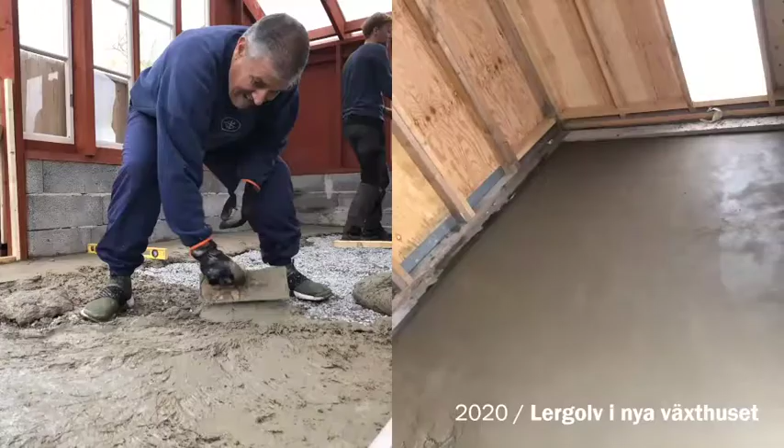I thought it was well put that we combine school with work, instead of having this division. It's about bringing community back into building, and that's what's happening at Egnahemsbyggande with learning and making real stuff as we learn.

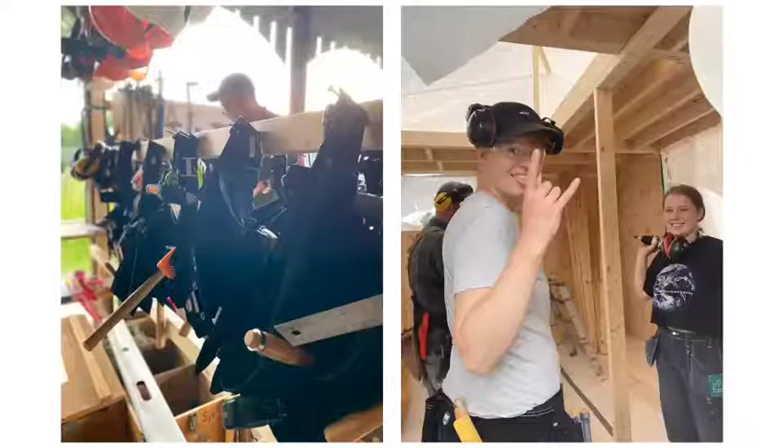When I'm thinking about building houses today as an amateur, to me it feels even easier to do, and that's my experience.

I wasn't there 80 years ago, but I think it's even easier to actually build a house on your own today than it was 80 years ago.

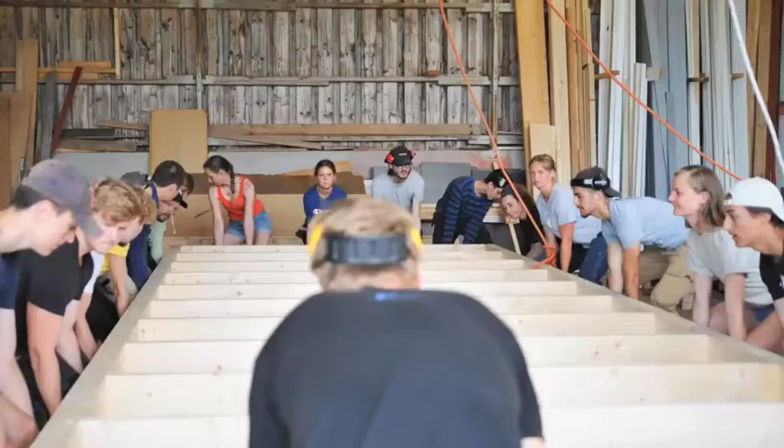Houses are more complex in many ways, but we have much better tools, much better planning tools, and much better technical tools. So actually we should be able to build, like we did 80 years ago, with more amateurs and professionals working together.

This is from one of our projects this summer, building Ellen's house together.

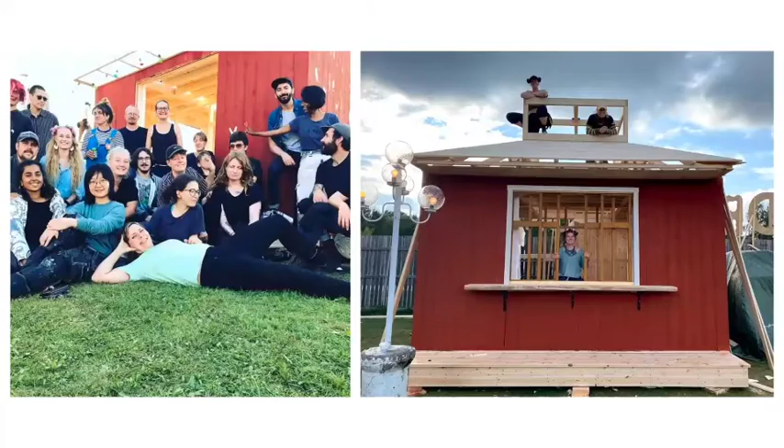This is another collaborative house building project we did this summer. Someone here that participated? No? Okay.

But the question for me is, these things are very nice, but can they be scaled up to building things that actually make a difference, by building whole areas of self-built houses?

Not only can we do the nice small things, but can we scale it up to provide the housing? I hope we will talk a bit about that today.

Now I'm going to give the floor to a person who is involved in a project that is perhaps an example of this.

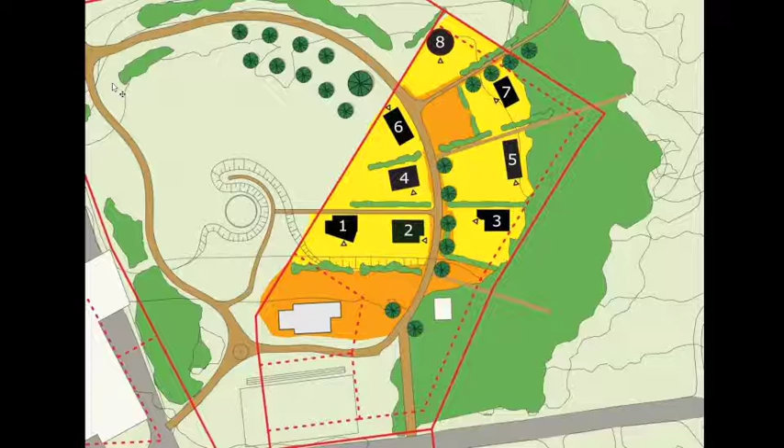Det var en fotbollsplan för 3 år sedan. Och vi har fått anstränga oss för att det inte ska se ut som en fotbollsplan längre. Den hade stått tom i ungefär 15 år. Det första vi gjorde var att börja gräva för väg och husgrunder.

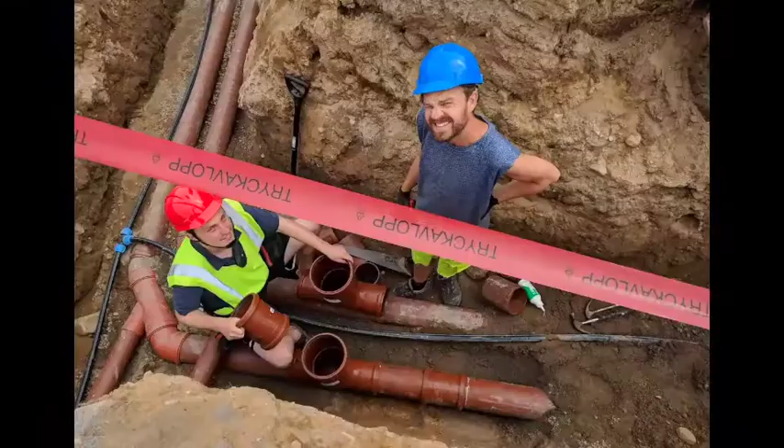Vi hade inte tänkt ha vatten och avlopp i de här husen eftersom de skulle vara enkla. Men när vi ändå grävde vägen så sa grävmaskinisten: ska ni inte lägga ner lite rör? Och det var ganska bra gjort, för nu några år senare säger folk: ja, men om jag skaffar barn i framtiden så kanske jag vill ha rinnande vatten inne. Och om jag vill sälja huset så kanske det är lättare om det går att koppla på vatten. Så det ligger nerlagt rör till alla husen, både vatten, avlopp och dagvatten. Men ingen har hittills kopplat in det. Det är möjligt att göra till alla husen.

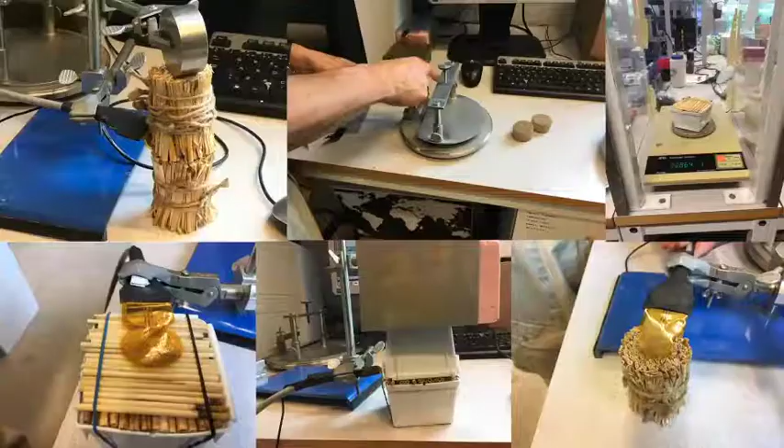Looking around, you find a lot of natural materials like reeds, straw, hemp, earth, stone, and many more. I tried to take samples to the lab for testing and experiment with the properties of this material, and also gather information from ancient, traditional, and vernacular ways of doing this kind of construction, and how we can do it in modern ways, respecting our modern needs, our modern codes, and all these kinds of complicated challenges related to energy efficiency, and so on.

And of course, in the lab, people thought, she's nuts, what is she doing with this amount of reeds and clay, is she going to build with this? But yeah, it went day after day, developing the techniques.

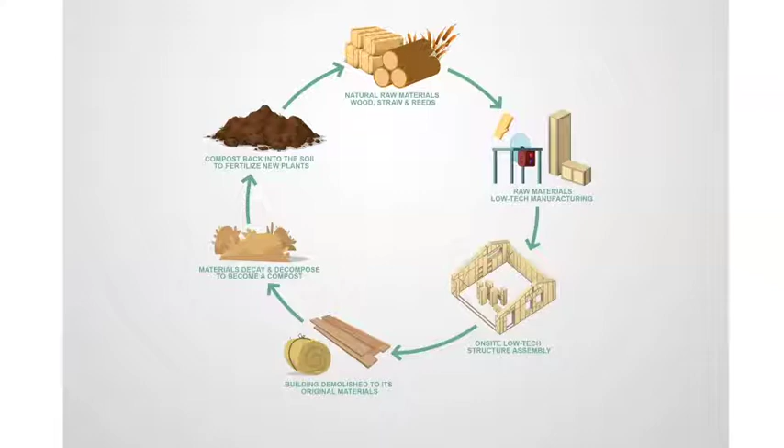And trying to close the loop, as Steen Muller were telling us yesterday and also today, how everything goes back to nature at the end of the life cycle of the building. And not only go back to nature, it can also be upcycled and recycled and reused again as building material or for other different functions. So the loop is not closed, it continues to work as our life cycle continues to work. Nothing goes in vain or in vacuum.

So the process was like this. I worked with refugees in a participatory manner, did a lot of interviews with refugee families, did also a lot of interviews with experts, and started to sketch some design ideas, going back to refugees, discussing it with them, going again to talk with architects, municipality people.

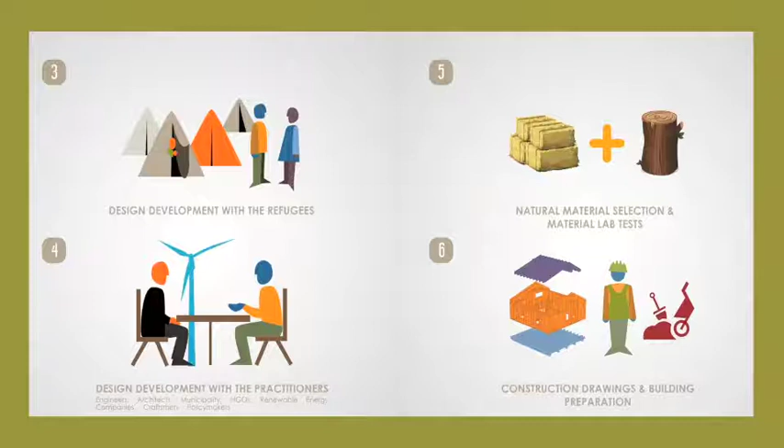We have here our colleague Christian. We had a lot of talks with Lund municipality concerning also the feasibility of doing this prototype in Lund, talking with engineers and craftsmen, settling on what kind of material to be used and trying to find a structure system that is easy and quick to construct.

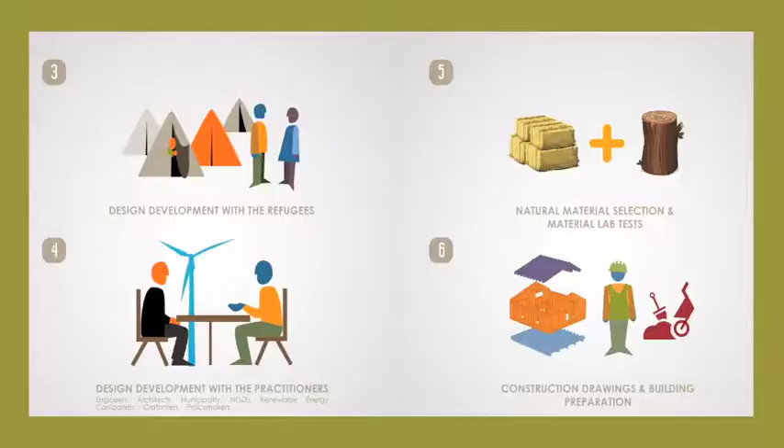Putting this as a normal architecture concept, you have a land, you have a client who is, for me, a small refugee family as a demo case to work with, trying to find the right mass, the right proportion for the housing needs with rooms according to the regulations in Sweden for minimum housing standards, and also the UNHCR minimum standard for refugee housing, and trying to make the compromise.

Thinking of how we can provide the building with the renewable energy needed, how we can provide heating, cooling, natural ventilation, and natural daylight with passive means, depending only on natural forces from the sun and the wind. Very challenging because the climate in Sweden is not that easy to work with.

And then trying to find a structure system that is easy, like Lego pieces, that you can mount yourself. So here comes the Danish inspiration and the Swedish inspiration together with the IKEA style and Lego, and how we can do something that is easy to fix, in a home kit that you can work together.

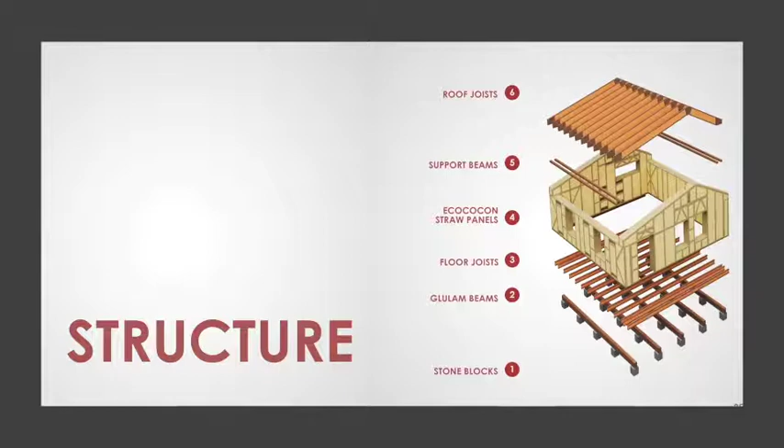With it, I collaborated with Ecococon because they produce these compact straw panels. It's a very easy way of doing it. You have straw bales, you compress them. You just need a compressing machine and plywood, which can be any kind of recycled wood. And you compress it with this pressure, it becomes fireproof.

I worked also with how to make it anti-rodents, how to make it water resistant, and how to achieve the passive house standard U value. And actually, it managed to perform beyond the passive house standards when it comes to efficiency. The total performance of the house is 40% more efficient than what we have in the Swedish code for energy efficient housing.

Only by passive means, the indoor temperature can be 11 degrees all year round. And then with our cooking and moving and using electric devices together with the other passive means, you can reach an average of 20 degrees indoors.

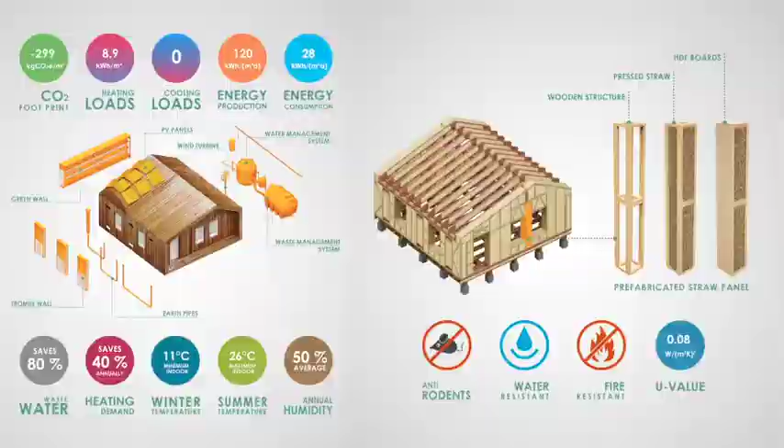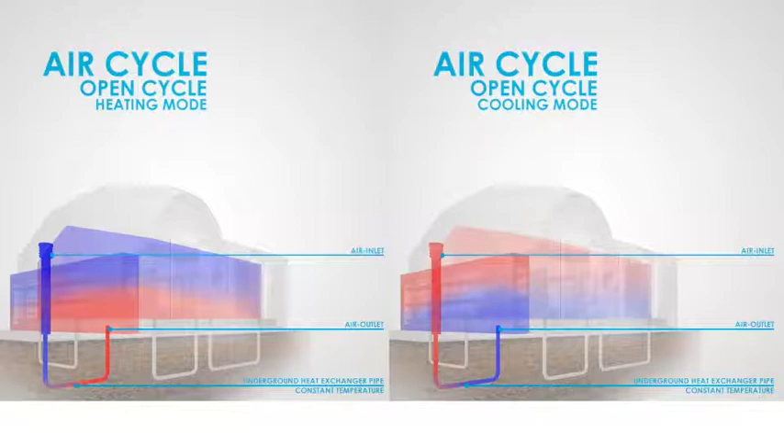About the ecosystem that managed to reach this kind of efficiency, a couple of passive systems are used, like open and closed earth pipe cycles for both heating, cooling, and natural ventilation. The open cycle is for fresh air, and the closed cycle is for just heating and cooling.

I use green walls, and they are not only for having greenery in the house, but also for air purification. They can filter the air, and you can have oxygen all day round, because some plants produce oxygen 24/7. We think all plants take in oxygen at night like human beings and give off carbon, but some plants give off oxygen during nighttime too, which is very good to use in sleeping areas.

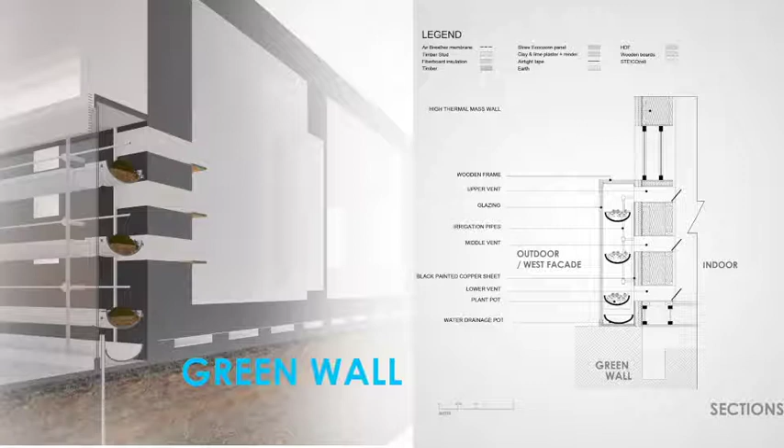The green walls are also used for passive heating, so they have a 3-in-1 function. They can be adjusted for day and night performance, for winter and summer performance. It is low tech and manual, but you can upgrade them to be high tech with sensors if needed, because this house performs off grid and on grid, depending on whether it's in a rural or urban area.

So another passive system is the Trombe wall system. It's a classic system from the early 18th century, but here it's used for multiple functions: for heating, for cooling, and also for air purification.

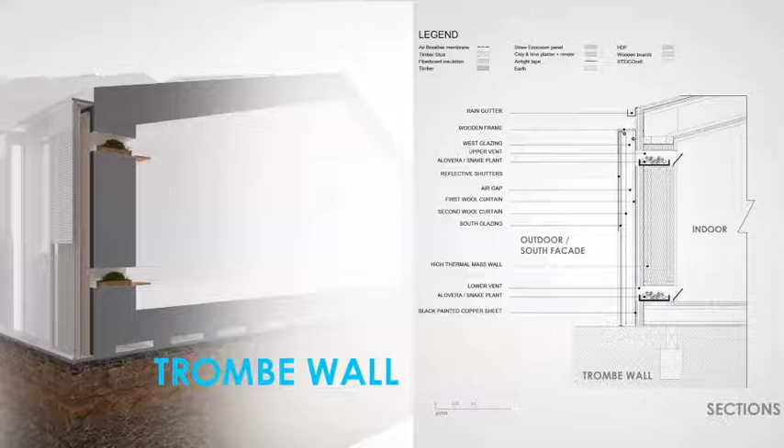If you use some of this vegetation in the air openings, it cycles the air inside the building using no fans, no electricity. It's just by understanding that we have a difference in air pressure, positive and negative, when air is cold or warm. So by using the sun, you can activate this movement of air inside our buildings. Again, it is adjusted according to the season and the need.

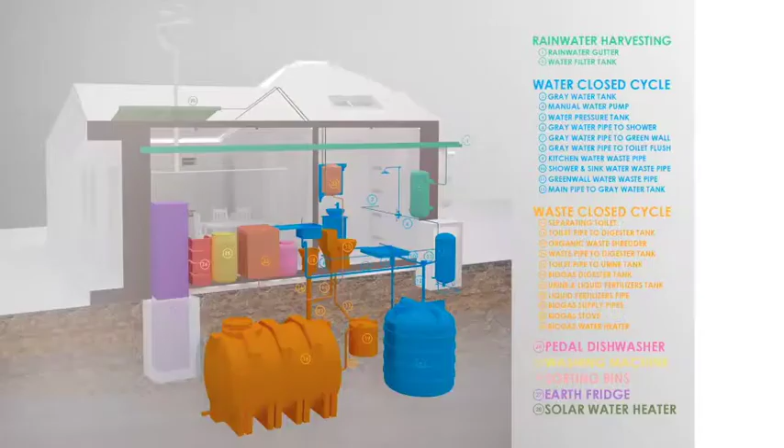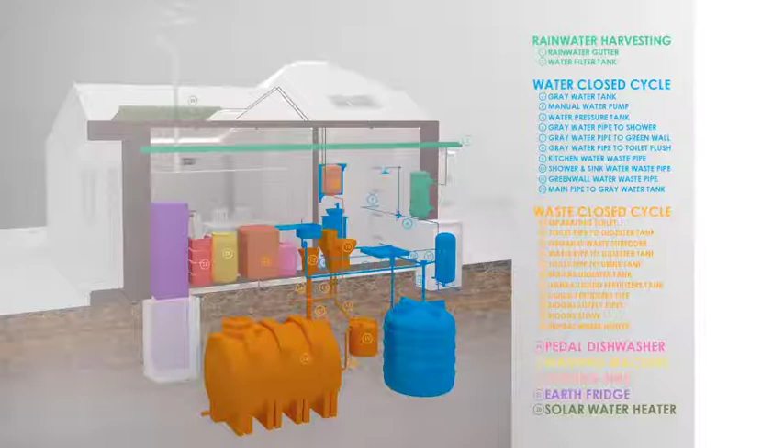The waste management system, as I said, the target was to achieve zero waste, so everything is recycled, upcycled, and reused inside the house. The organic waste from the kitchen and from the toilet can be used as organic fertilizer, as compost, or mainly as biogas. The biogas is used for cooking, and partially for heating water for the shower, and also for heating the entire indoor envelope of the house.

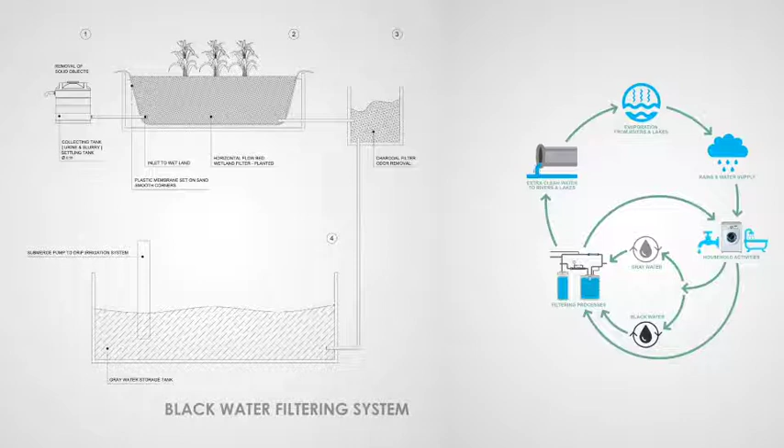And there are many gray and black water cycling systems. If there is excess water that has to go to the grid, it's actually purer than what we have now in polluted rivers in Malmö, for example. This uses natural means, inspired again from traditional and vernacular architecture, showing how they managed to recycle and purify their water at all times.

And how about the energy supply? Of course, we cannot have sun all the time in Sweden, but some sun, some wind, and together, if we have a blackout, we can use this very basic idea known in many parts of the world to cycle energy. You can charge a small battery, and use it during an extreme blackout situation to charge a mobile phone or just a lamp.

During the work with the refugees, as I said in the beginning, everything in the program of the house is inspired by their needs and problems in their current housing situations. Many of them said, we need a washing machine and we need a fridge, but that is not economical to have in every single house if you want to build low cost, affordable housing.

So inspired by root cellars, where you keep your food in storage for some time, we designed a fridge that is very healthy and neat, inside a kitchen cabinet. You roll it down a couple of meters with your food, and roll it up when you need it during your daily needs. This way you can keep fresh food for at least a couple of days, and you don't have to go shopping every day to have fresh food all the time.

All these systems work together. Passive means cannot work individually; they have to work in a collaborative manner, because you cannot control the sun and you cannot control the wind. You cannot say, okay, the sun is shining from 1 to 2, let's use this for passive heating—it's not something you control with a button. That's why you need multiple passive systems working alternately during daytime, nighttime, different seasons, and also according to our human needs.

It is hard to achieve that in affordable housing. Even daylight was an issue, because of scarcity of daylight, especially in winter season. So how to maximize that and at the same time achieve privacy? That was my extreme challenge in this project.

Working with people with special cultural backgrounds, privacy is important for them. In Scandinavia we have wide windows everybody can see in, and people have to put dark curtains all the time to make it private. But that's not good for health, and it's also bad for energy consumption, because you have to put the light on all the time if you block the daylight outside.

So by using those albedo shutters, inspired by cool roofs, I tried to maximize and double the daylight. These shutters provide safe privacy, and at the same time double the daylight inward into the houses.

You can see the integration of the passive systems with the whole windows for air ventilation and air purification, integrated into the design itself. So it's not just ugly holes in the wall for functional purposes.

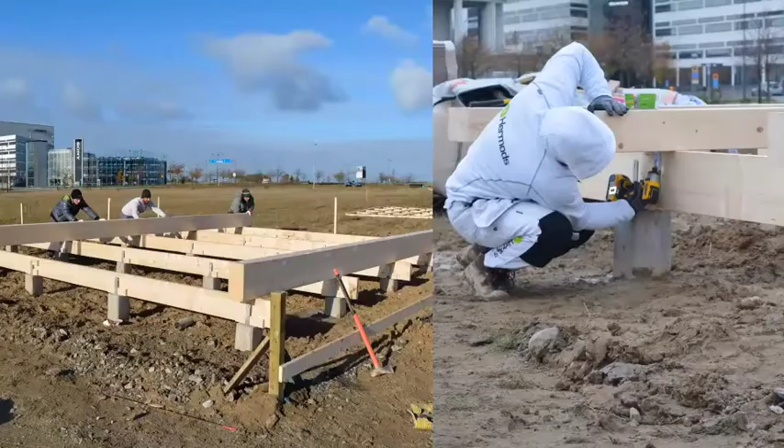The work on site was the most fun part, where we did everything ourselves without any technical background. I think it was the same way in your projects. People had very little or no technical experience. We were 7 persons on site at maximum.

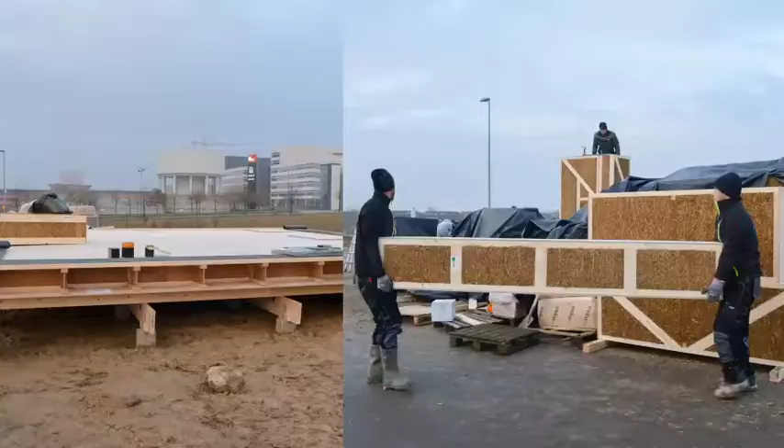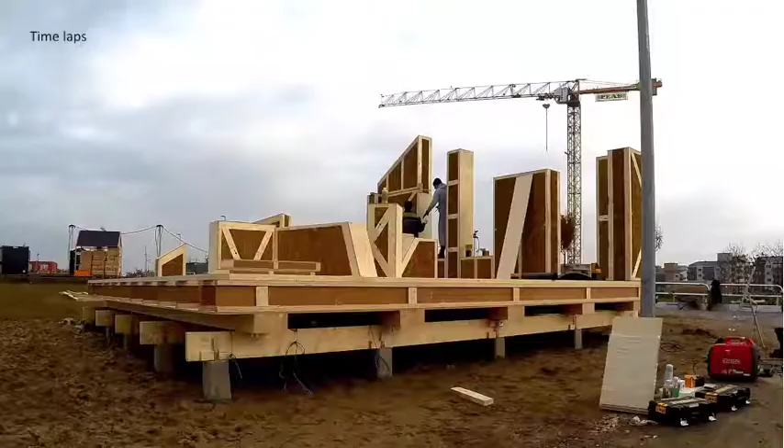During 11 working days, we managed to construct this 37 square meter house using only screwdrivers. If it was summer, we could have only used solar panels to charge the screwdrivers, but because it was winter, we had to use something else.

I think that is also a video. Yes, we used only this - what is called a generator - to charge the screwdrivers.

And that was not our crane, it was the engineering project's crane. Everything here is low tech.

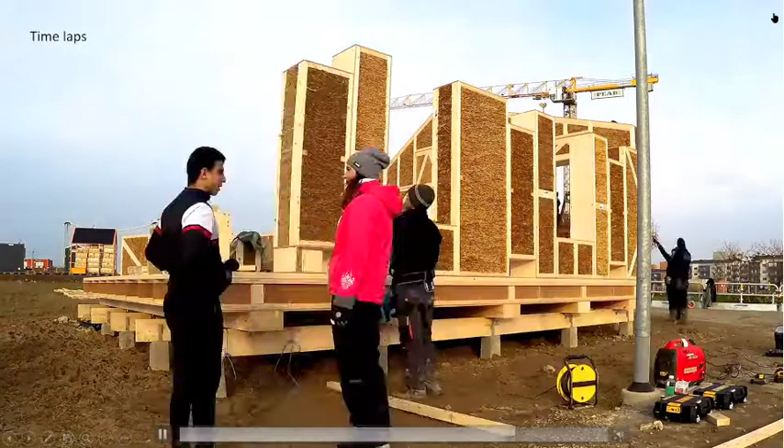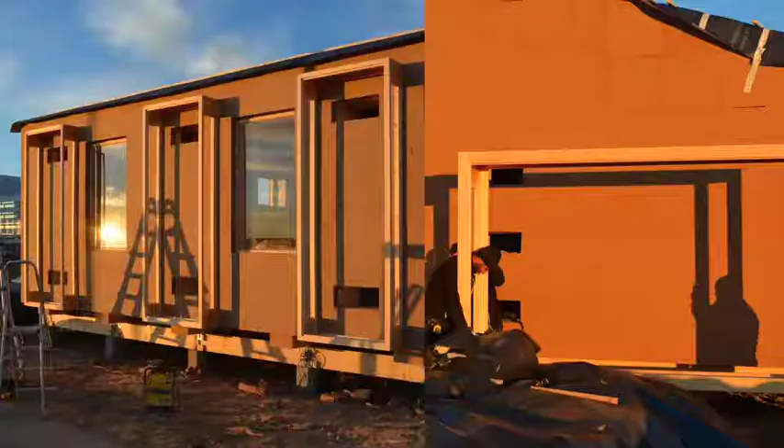In 1.5 working days, we managed to finish the whole walls and start also with the roof. After that, we covered the house with wood fiber boards for insulation. Then we assembled the passive systems for the trombe walls and green walls, and started with the final cladding.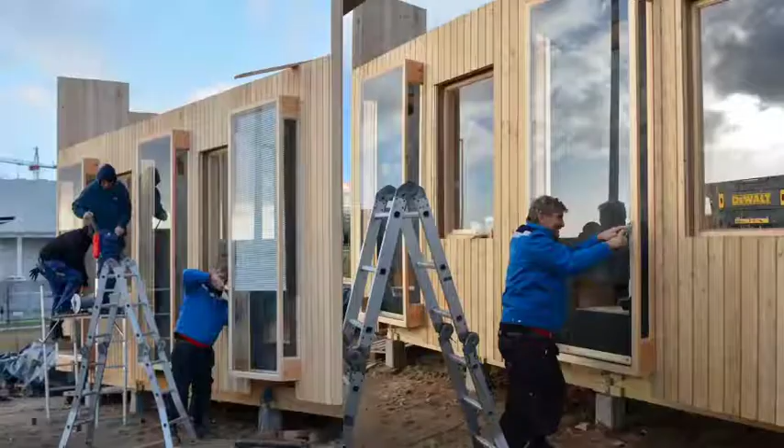I had high hopes to do it with clay, but because we had to work during winter time, it ended up being wood cladding. Then the glazing for the trombe walls and the green walls, and the roof cladding. That was the final outcome after putting in the solar panels.

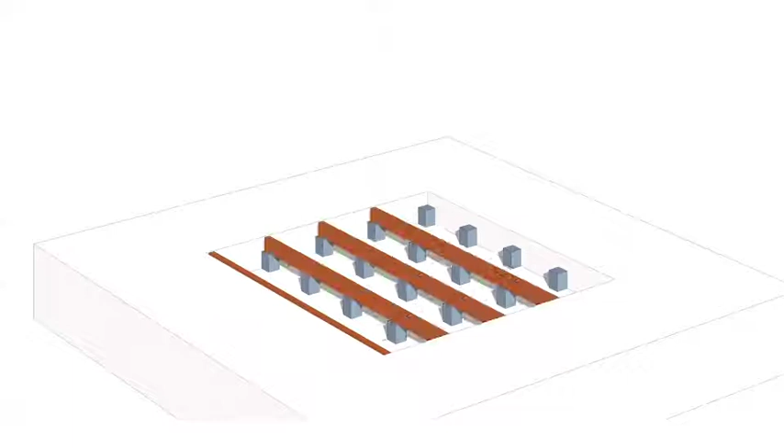You can see here the steps for the construction. We used a really simple approach, even in the foundation, just to make it quick and also possible to relocate from one place to another.

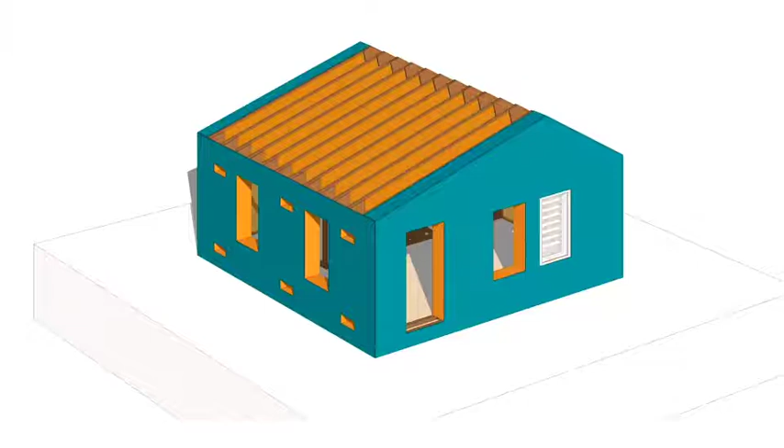This house can completely be dismantled into pieces and assembled again in another place. If you don't want to disassemble it, you can slice it into 2 pieces, since the dimensions were made so it could be carried on a truck in 2 parts, within the maximum width of a truck. So everything can be unscrewed and reassembled again - a kind of circular way of construction.

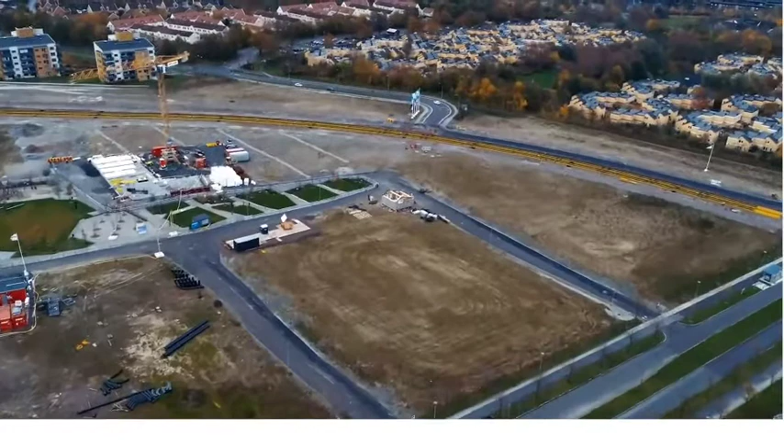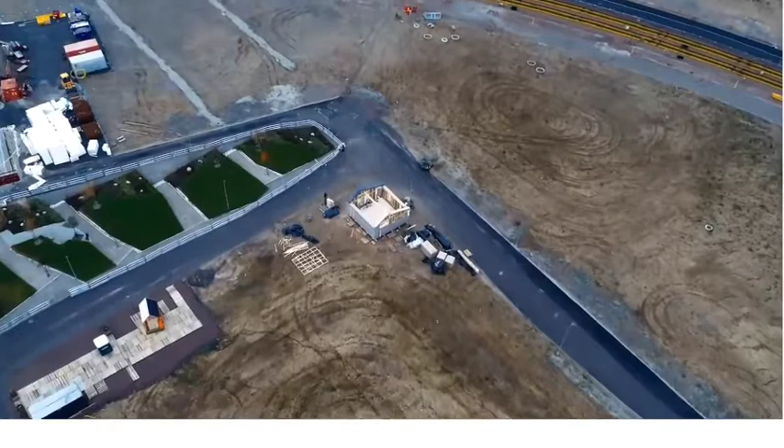Of course, Brunnshög doesn't look like this anymore. After 3 years, this whole area was completely developed with different other buildings. So that was a kind of start for this new development area in Lund.

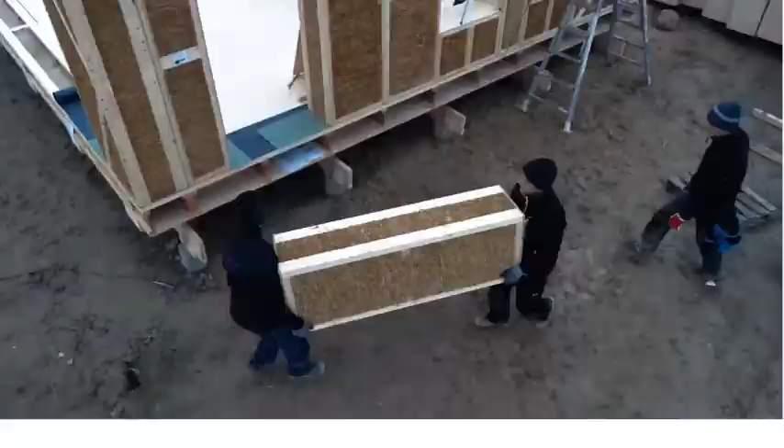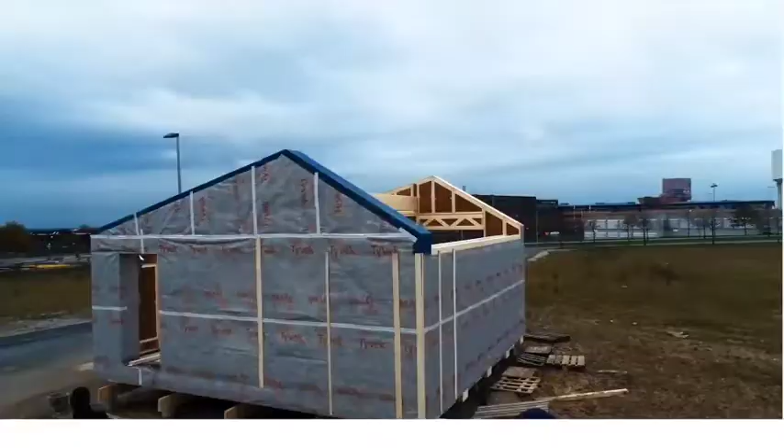Of course, we had technical support along the process, because it was a kind of learning workshop for the refugees, so they could learn to do it themselves later on. It was also a way to give them education and knowledge they could continue with, even if they wanted to start a business on their own.

And that happened actually - 3 of them started a company.

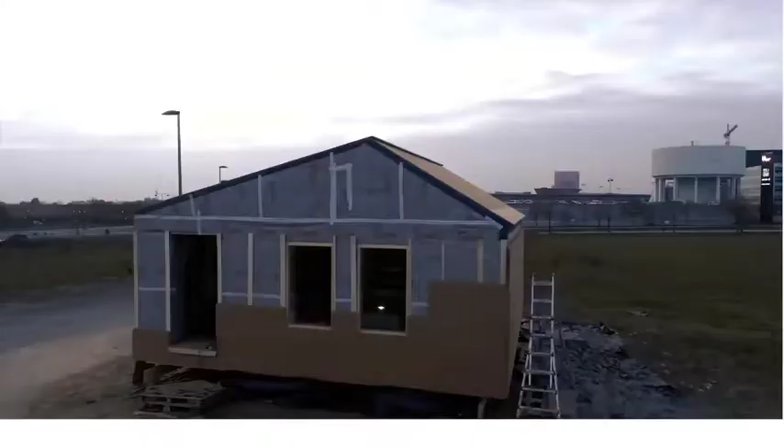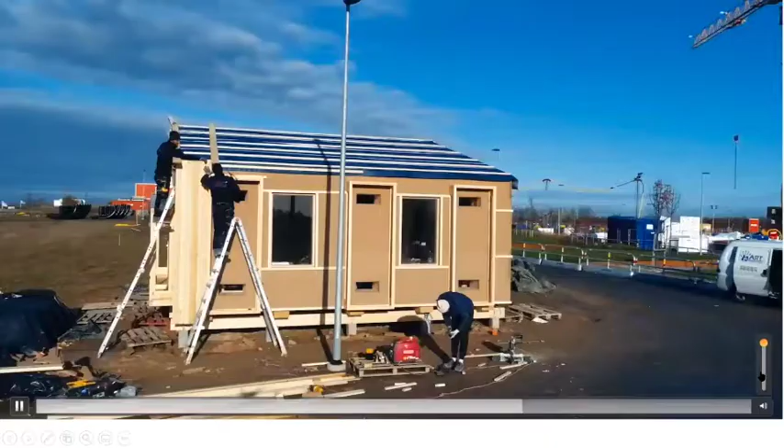So 3 of them managed to start a company actually after that, following the same concepts.

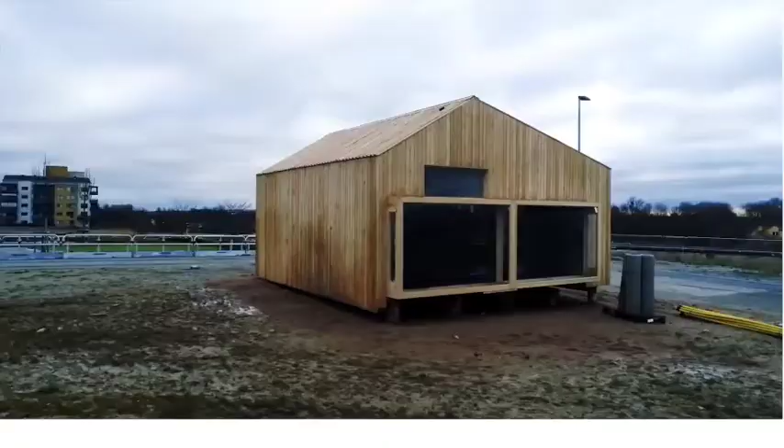This little caravan was the leftover - in this small caravan we had the leftover wood that we took to a recycling station. So almost no waste was produced from the house construction.

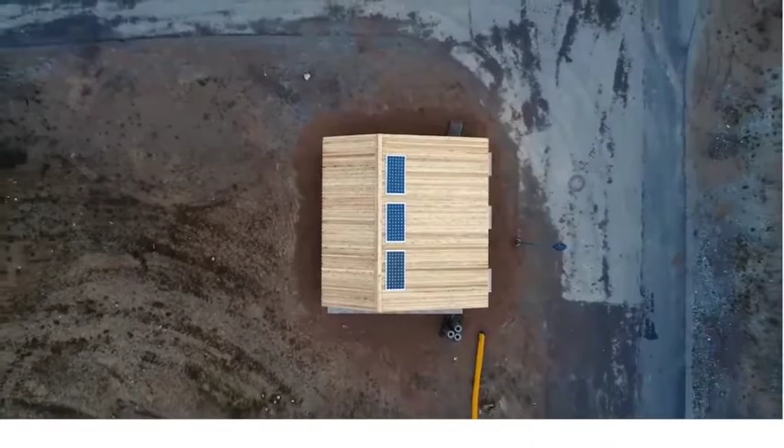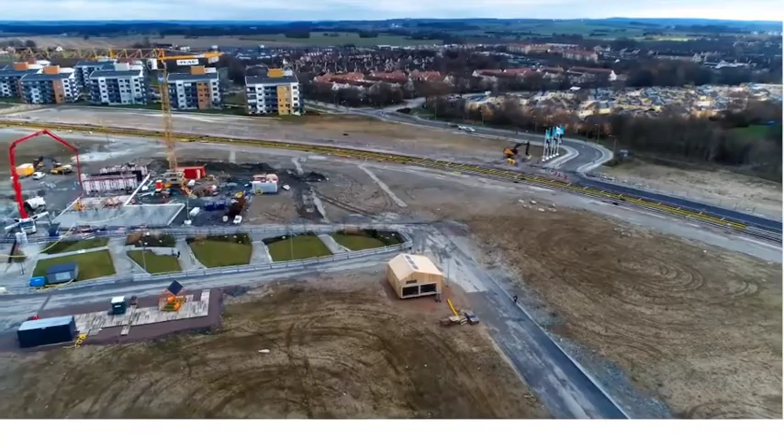And because the idea of the house is to have it as an open access concept, everything that I have talked about today, you will find it open access.

But before ending, there are of course challenges and lessons learned from this experience. We still have lack of knowledge in how to design and construct using natural materials. Working in academia, I assure you, we don't do that in our courses and programs. It's very seldom to find a course that teaches you how to design and construct with traditional techniques in a modern way, because you can learn traditionally to conserve, but not to do it in a modern way. Working in Sweden compared to Egypt, for example, man hour is extremely expensive. They have a stopwatch every time they come to help you with something. So low-tech approaches is a big challenge in that manner.

Codes and building regulations do not support building with non-conventional materials. Also, to find a controller to sign off a house that can be safe to build is another challenge. There is lack of trust between investors and contractors to work together in order to construct and build with these concepts. So it stands at the end as kind of like one pilot project here, one pilot project there, or as you said, a hippie style, but not mainstream.

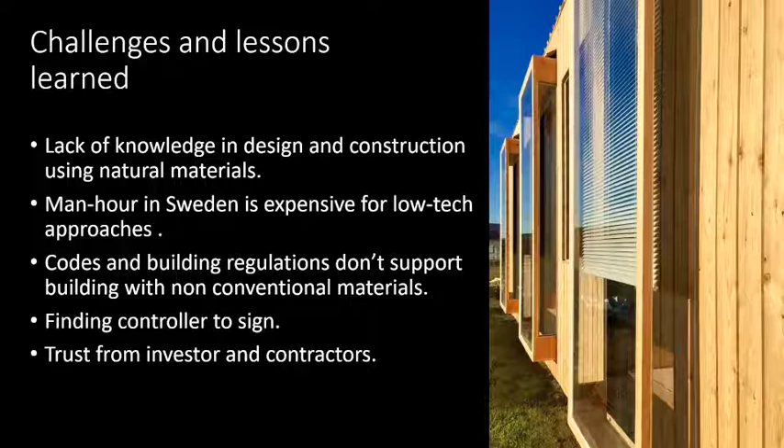Everything can be downloaded and open access. Every single detail of the drawings for the house is in this book. So feel free to have a copy for yourself until we have a decent shelter for everyone. Thank you so much for listening.

I have to ask again, do we have a price on this house? Because it's a research project, the price to do all this together with all the errors and mistakes and everything I had to do in the beginning to find a way of doing it, with lab testing, everything, with incentives for the people who helped on site, is around 400,000 Swedish crowns.

How much? 400,000, that's 40,000 euros. Yeah, and it can be less. I'm calculating everything, with all the mess included. Did you say 40,000 euros? Yes.

Then the work is what is not regularly paid. It's what volunteers do. Yeah, they were volunteers, but it was kind of incentives because you cannot just use them for free. It was an agreement with what is called Arbetsförmedling, the labor office, because they try to find ways to have training for refugees. So they pay them part of their salary, and through other work you give them incentives so they can have a decent income.

So as a home self-builder kit, that would be the total cost, because you do the work yourself. Yeah, you just buy the material and assemble it. And one straw bale, from the neighbor farms, was just 10 crowns. If they put it in storage, it would be 30 crowns. So it's better to take it from the farmland before the farmers take it to the warehouses. It's cheaper, and they will be happy to let you, please go and take whatever you want. So 10 crowns is nothing for one straw bale. If this house, the outside area is 40-ish square meters, it can be maximum 7,000 crowns just for the walls material.

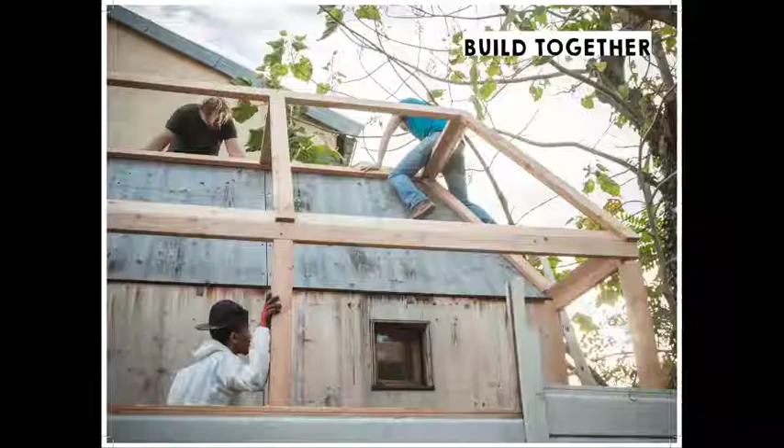So we are architects, but we are builders too. We try to put designs into action, and to put it into action, we learned how to build things, how to build as architects. So we knew how to design, and by experience, we learned how to build things.

We have different programs, as you said. We worked in shanty towns, in slums, and from those perspectives, we understood that communities could be good, but could also be a break to insertion of people. So we understand the building as an inclusion process. It's not only a product, it's a process that brings to inclusion.

To build together, you have to volunteer in our case. So it's only about volunteering, giving one day, two days, a week to build tiny houses and other things.

Volunteering is not that simple for people. To volunteer, you have to have money to supply your own goods. The economical model about building together based on volunteering is, so to say, for wealthy people.

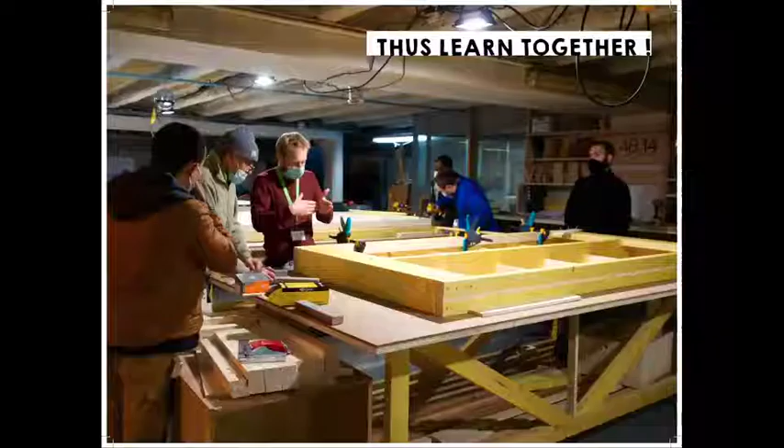So our designs comes always from people's needs. And this can be about public spaces, as you can see here, but also about the housing solutions that we will show just after. And the aim of that is to learn together.

Romain just told you about this insertion program we have. We are very proud because we have a workshop. So we have our offices and the workshop are really close together. We just have to walk the doors.

Can we try to build that? Maybe we can use straw. We also use a lot of second-hand materials coming from industrial waste.

This is really important for us because it is a way to address a big issue in the construction processes that we all know. So I'm not going to be longer on that.

But we are very proud because this workshop received an agreement to become a training place. And so we have public money to train people into ecological construction, and especially to train people who are very far from the employment market in France.

So here, what you see on the pictures, these are people who just received the refugee status in France, and they are being paid to follow this training program. So it enables them to follow it deeply.

And while doing the construction program, we also work on learning French, making a curriculum, and meeting companies so that at the end of the training session, you can actually find a job.

And yeah, we try, we test, and sometimes we fail. It is an iterative process, and I think most of you know it. It is difficult to invent a new solution, so sometimes you fail, but you just have to stand and try again.

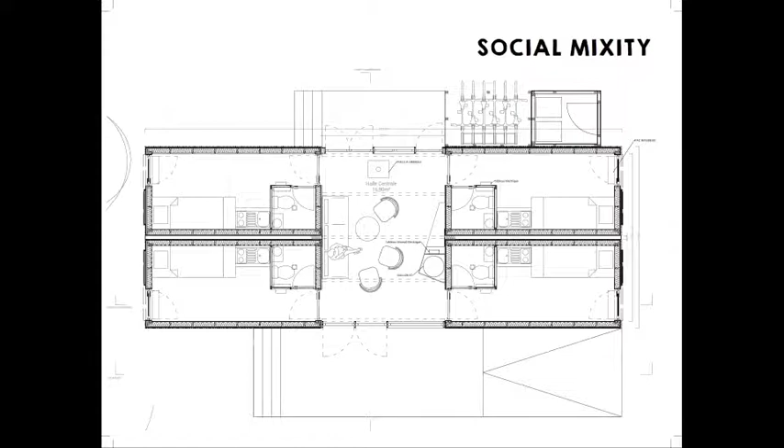So it's about inclusion, it's about co-housing, but does it work? We're always talking about social mixity—let's put people together—but does it work? We don't have a lot of evidence, but at least we have some in our experience with tiny houses.

This is a tiny house from the program called IMBY, in my backyard—you know, the NIMBY movement, not in my backyard: 'I don't want those guys in my backyard, I want them over there.' With this program, we propose to people who have a house and an empty plot in their garden to place a tiny house and host a refugee person.

It means we foster social encounters between someone who has space and money, and someone who needs space and money. We do that by funding those tiny houses as an NGO. We find partners and things like that. The price is quite low for the material—around 15,000 euros, depending on whether it's built by carpenters, through a training program system, or by auto-construction.

But furthermore, the important thing is that people living in these tiny houses are not alone. They meet a host, but they also meet a network—a network from the host, but also from the community we're trying to build. Therefore, it's not only your fault to be integrated; it becomes something that belongs to the whole community.